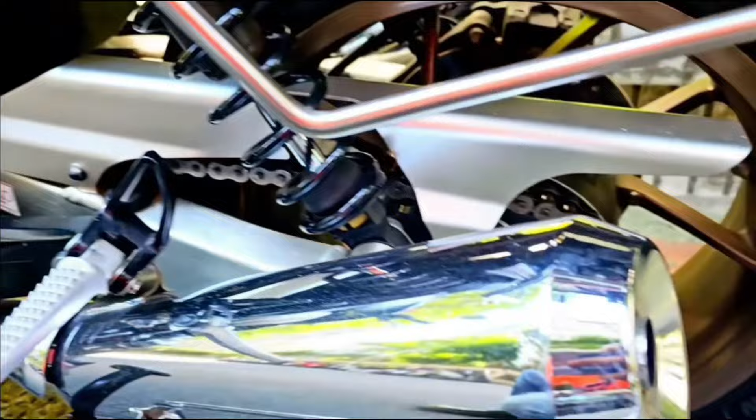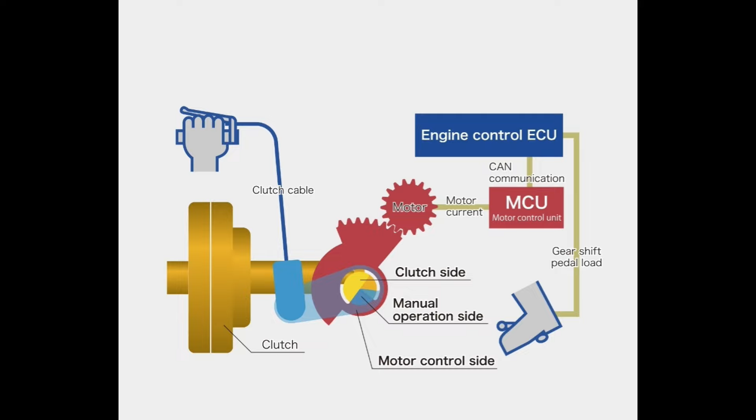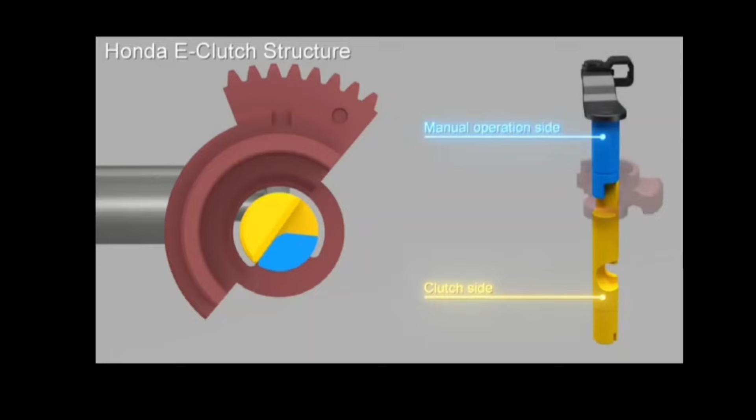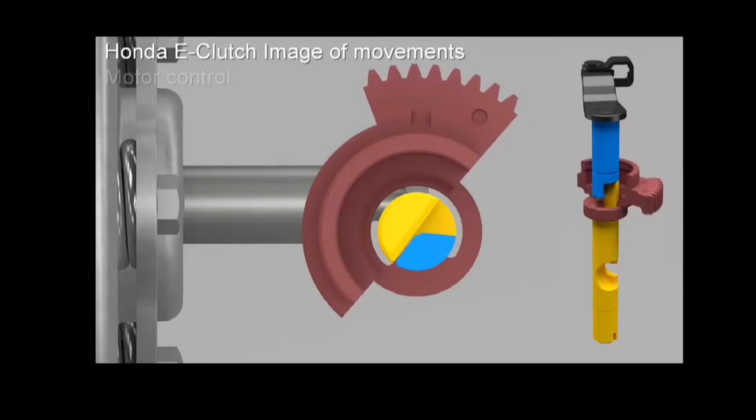If we look at this video, we can see that the new design for the E-clutch actually enables two different movements from that one single shaft we've got in our bikes at the moment. It makes it possible to mount the system with a minimum number of changes or additional parts and without any major changes to the conventional manual transmission engine structure. So there's not a lot needed to go into it. The structure has a minimal impact on the rider's foot space as well. There's a little mount on the side, but it doesn't affect much of the movement for the rider, which is pretty cool.

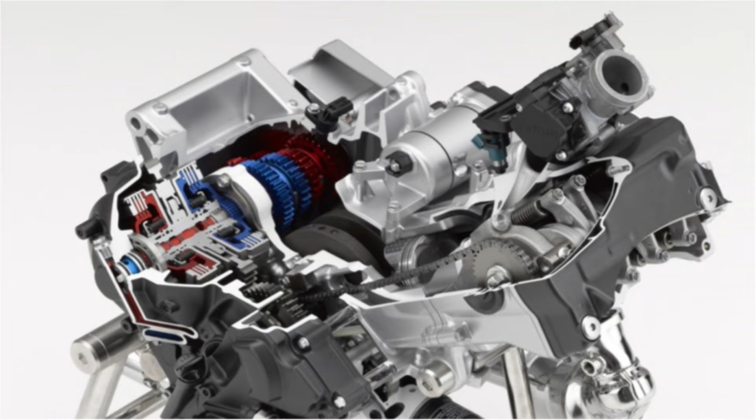So next up, I'm going to give you a few little slides for the diagrams of what it's going to look like inside the engine. You're not going to see it, but it's just worth looking at. It's also going to show you the E-clutch mount that will give you plenty of room just to use your feet, so don't worry about that. There's no need for your clutch, but you can use it if you want. It's just where it's going to go onto your bike.

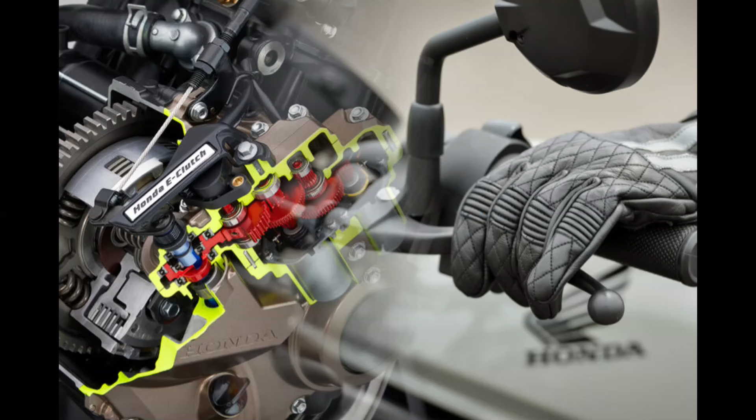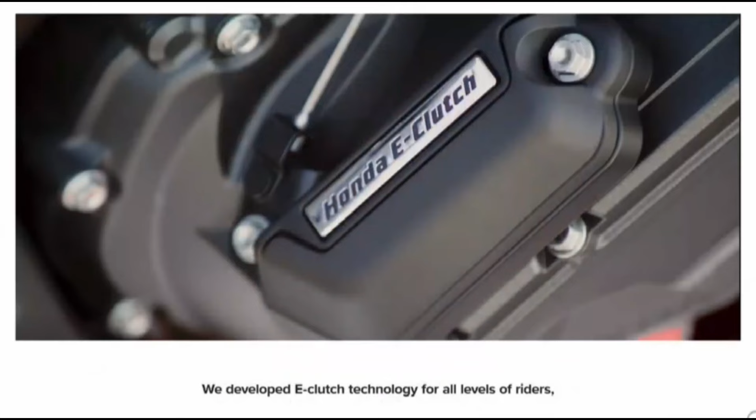Getting back on track with the Honda E-clutch, there's the electronic control technology that automatically controls the clutch without the rider needing to use the clutch lever. This will enable smooth starting and pulling off with the gear shifting. So long story short, similar to an automatic, more like a step through, with the old Honda Cubs that were back in the 70s and 80s. Use the gears but no clutch. So the automatic clutch for manual transmissions, new experience for the beginners and the experienced riders alike.

You can actually use these on a few other bikes. It's not just the Honda CBRs and 650s and things. I believe it can be used on other bikes as well, so you have to check. It's a very light system, only 2 kilograms, integrated into the right hand side of the engine, so it's going to go down where your brakes are.

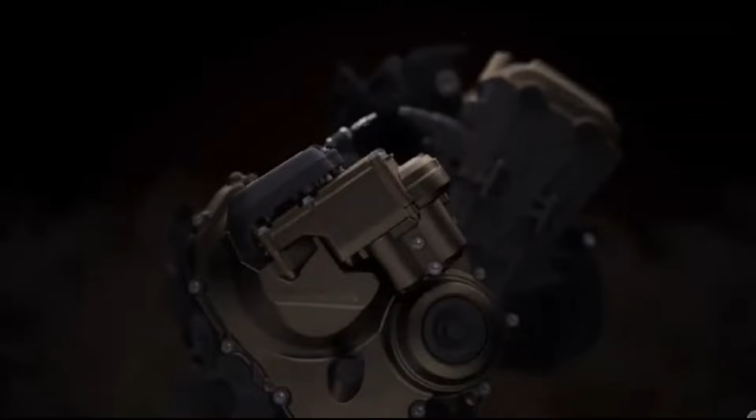It enables gear changes without using the clutch, so you can start and stop without using the clutch lever as well. You just change the gears down, use the gears as normal, except there is no need to pull the clutch. Like I say, pretty much like a quick shifter. It's making the concentration that little bit easier. You don't have to feel that biting point on your clutch. Smoother gear changes, possibly safer riding as well.

Who knows? Imagine all the clutch pulling you have to do in your riding in the city. It's stop, start, especially in Taiwan with all the traffic lights that are not in sync, I might add. Come on Taiwan, get this sorted. Hopefully it's going to eliminate all that.

In 2024, the CB650R and the CBR650R will have the E-clutch as an option. The technology will be added to other models in time, and I think you will be able to put these on other bikes as well. That'll be in the future, obviously.

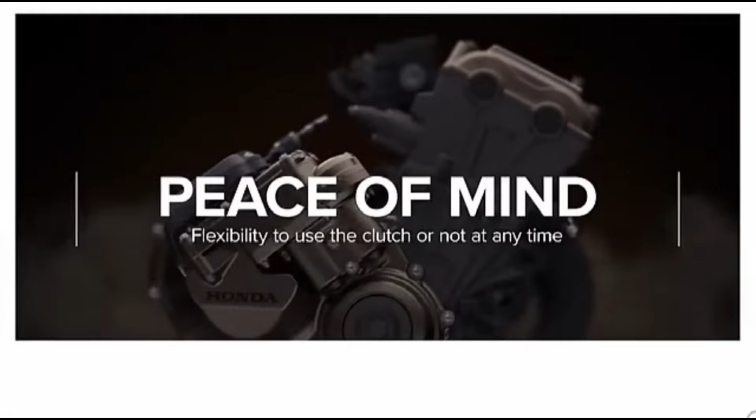So don't think that Honda will do away with the clutch lever, they're going to keep it. It's one of these things - DCT engines are pretty cool as well. I want a DCT engine, it's just having the money to afford it. They'll keep that, so you don't have to worry about that.

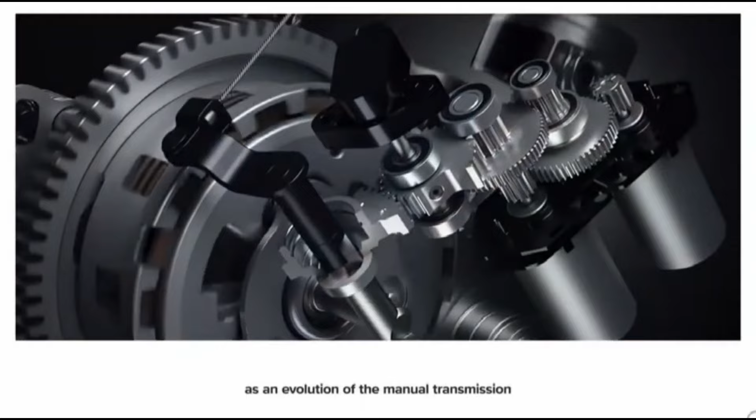The E-clutch is actually sophisticated enough that it readjusts automatically when you use the clutch above a certain speed. So you can use the clutch and then all of a sudden it's like, nope, you're not using the clutch. It's going to get back into that sync as well.

So there are 3 different settings to choose from. You've got a soft, the medium and a hard, so it depends how you want to ride, and these can be adjusted for both the upshifting and the downshifting, and they're independent of each other as well. So if you want that quick upshift but a slower downshift, you can do that, so it's not a problem. It's really cool technology.

You'll get a warning if you're in a higher gear for your speed, which is on your dash or cockpit. It'll be an extra little display in there, telling you basically change gear. Hey, you're in the wrong gear for this, change gear.

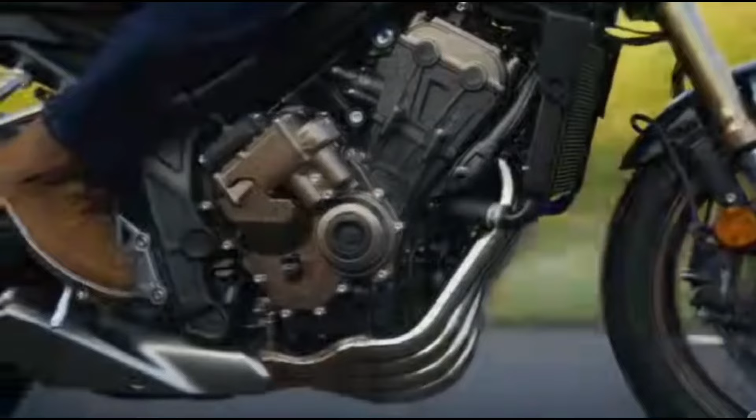So is this the future of motorcycle riding? Let me know your thoughts in the comments.